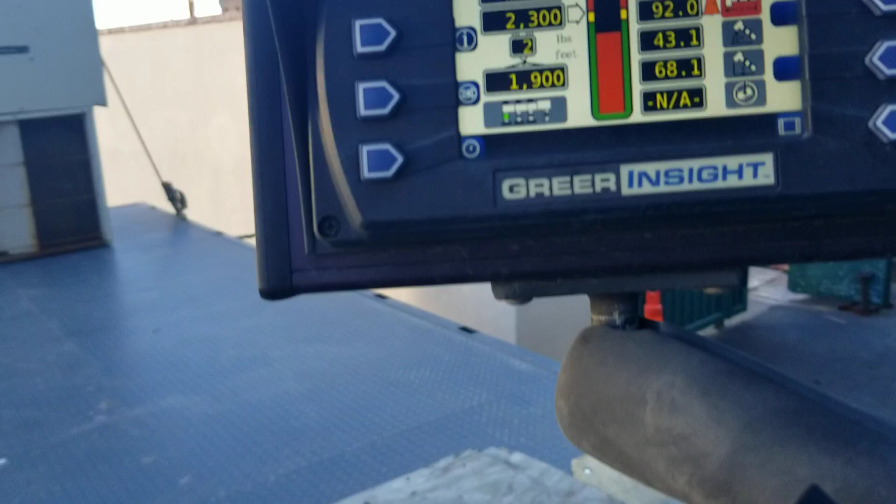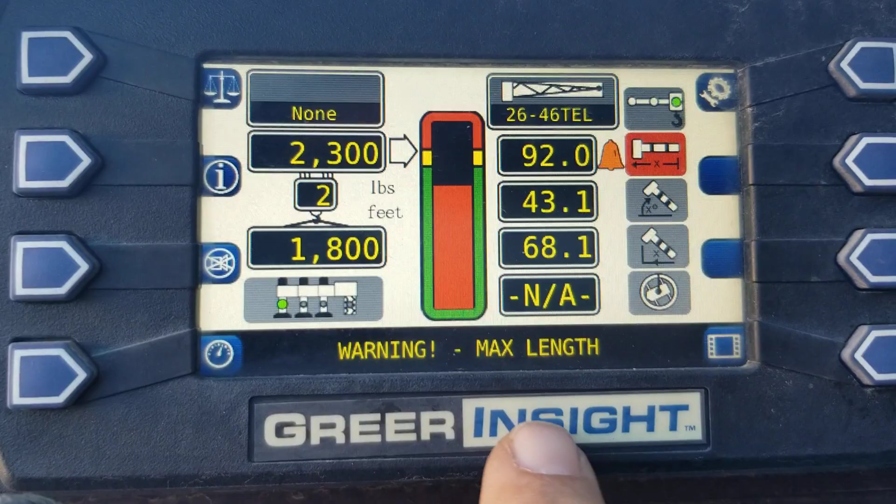Alrighty, here we go. This is called an LMI, load moment indicator. This is basically my computer for the crane. Tells me everything I need to know. Just a real quick rundown. This is an erroneous message. I think there's some kind of sensor wrong with this.

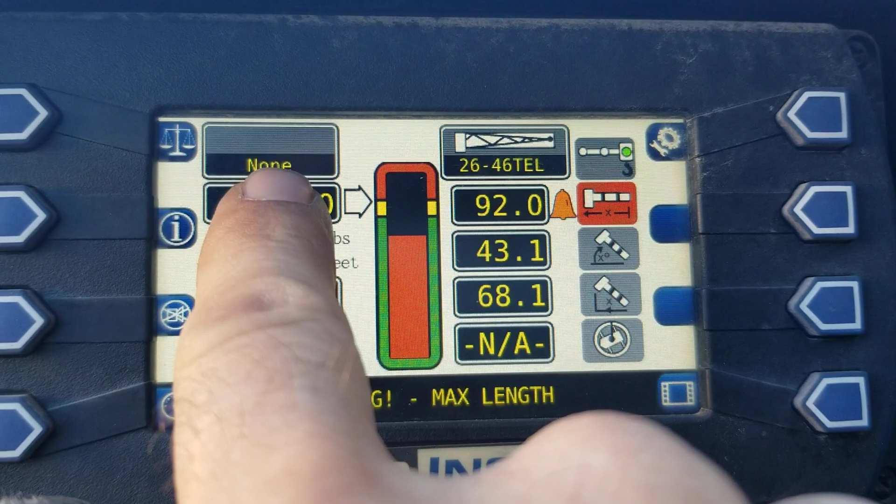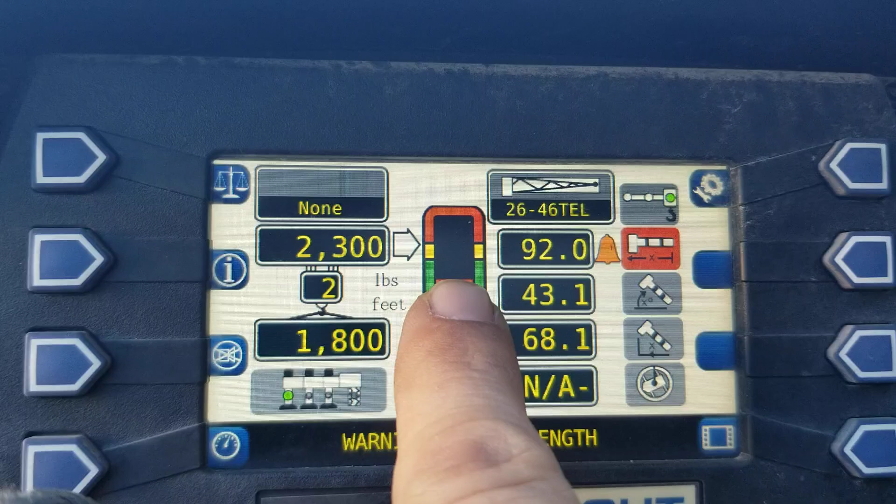Here, this is a counterbalance. A crane like this is not going to have counterbalance. This is my maximum load allowable. Over here, yellow, red, of course. Red is a no-go. Green is all good. You see I'm almost to the max. Here we have two. That's for two-parted line. That means it's reeved with two parts of line for this block.

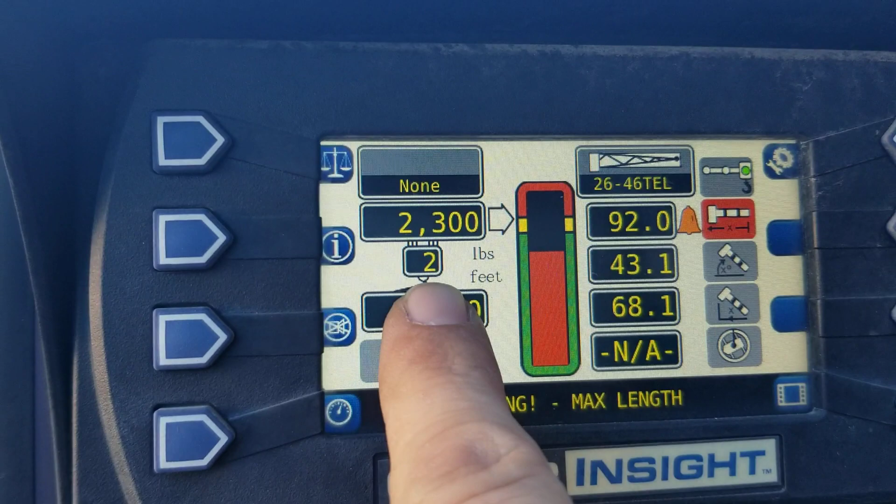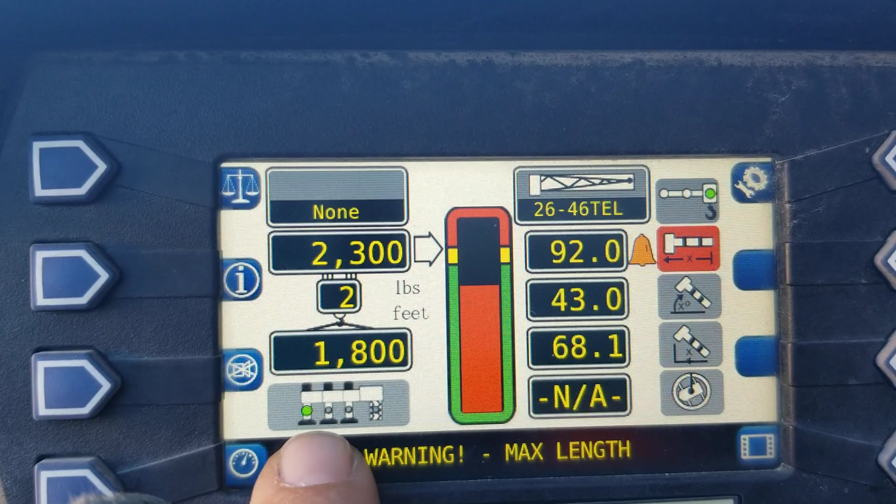This is what it's reading as far as the weight of the load plus the block and any other rigging that's involved. This is my outriggers. It's in the green, means I'm fully extended. This is the swing away jib, which is accounted for weight.

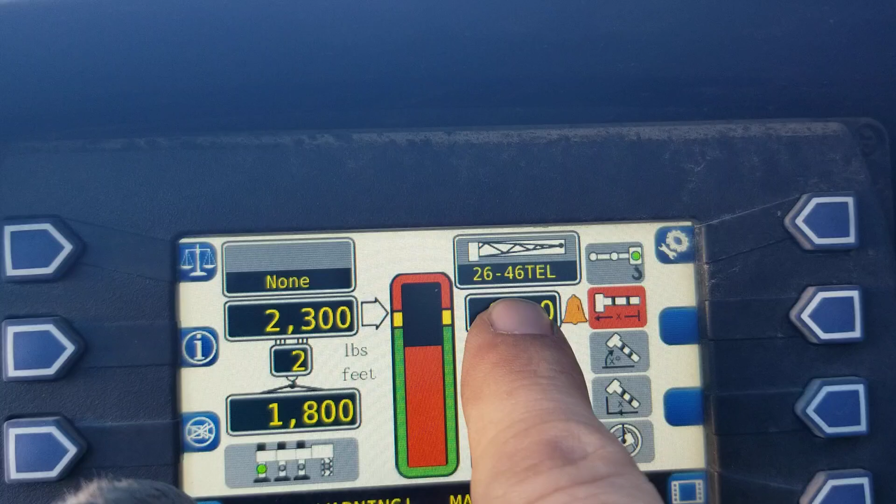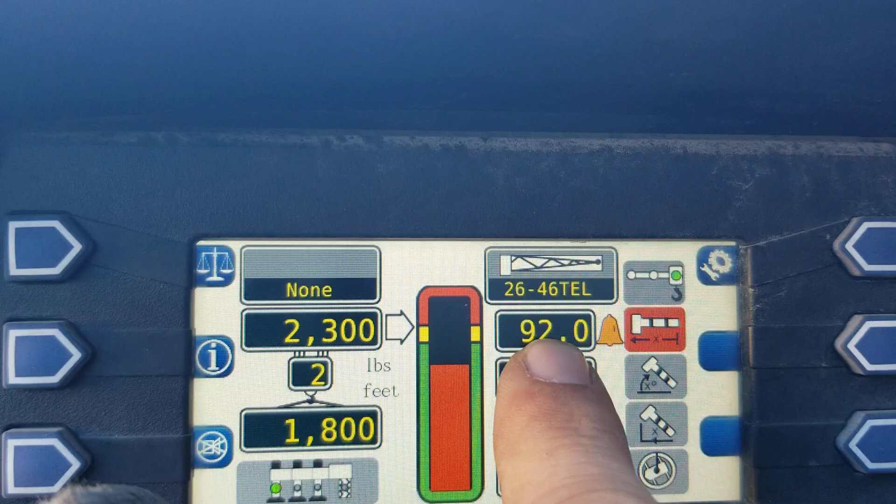This here, this is the maximum distance of the boom. The boom's at full extension. This is my angle of 43 degrees. And this here is my load radius. It's this distance of boom extended with this angle gives me this radius, meaning from the center pin of the crane to basically where the load block will rest.

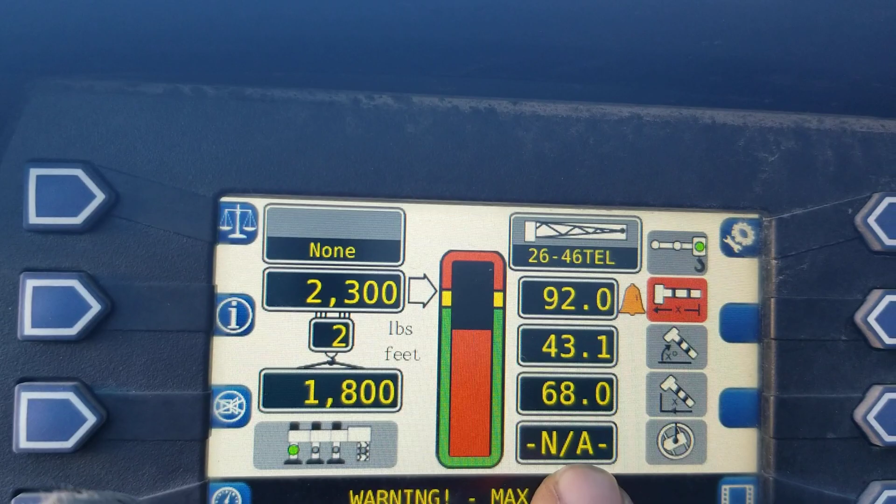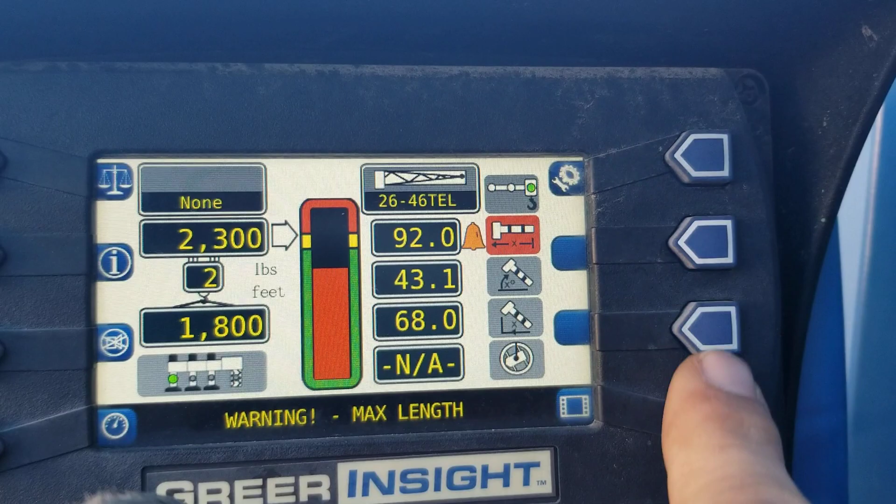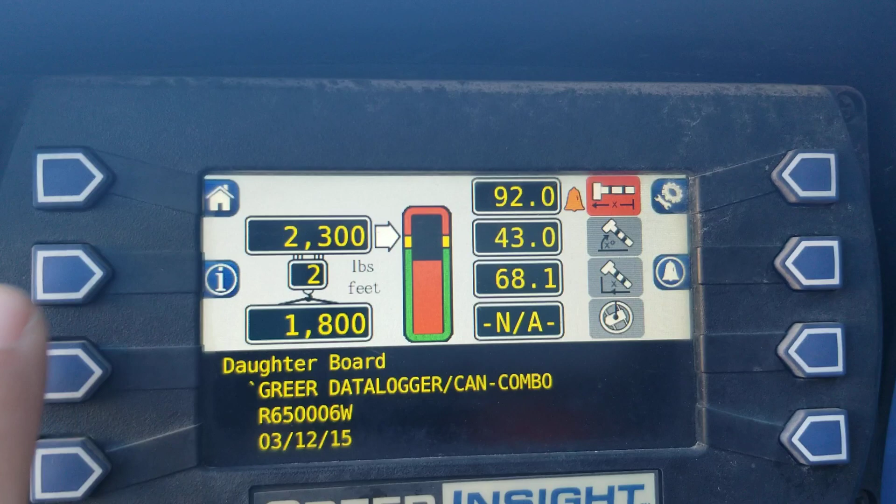And then this, I have no idea. This is something with my radius operating area. I don't use this crane. This is a rental, so I'm not familiar with this here. And you got buttons and shit that you can come in and access shit. This here, for example, is supposed to show my faults, which I don't know what the hell is going on. I think it's some sensor. So basically that kind of shit. Pretty cool.

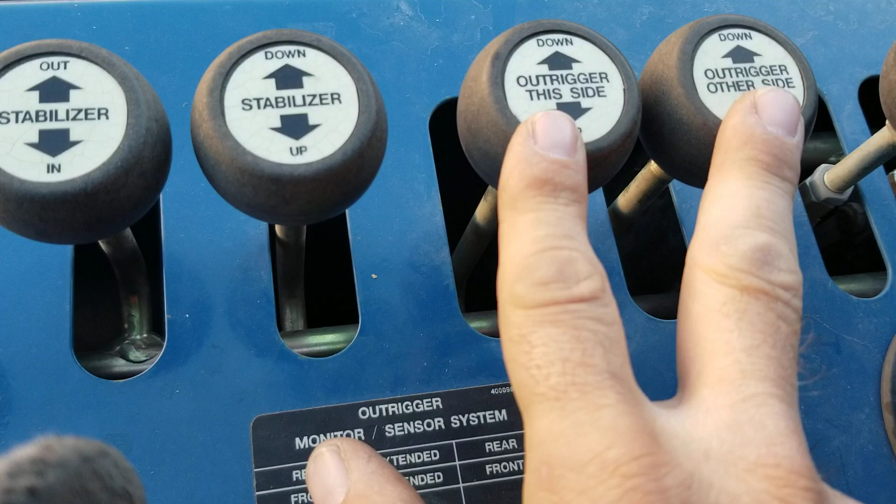These are the basic crane controls. Before you do anything, this is your outrigging. This is basically your jacks that jack up the crane to level it. These two are the main front ones to the sides of the operator station. This here is the rear, forward for out, in for in, and of course down and up. And this is for the very front stabilizer if you're going to go off the front of the crane.

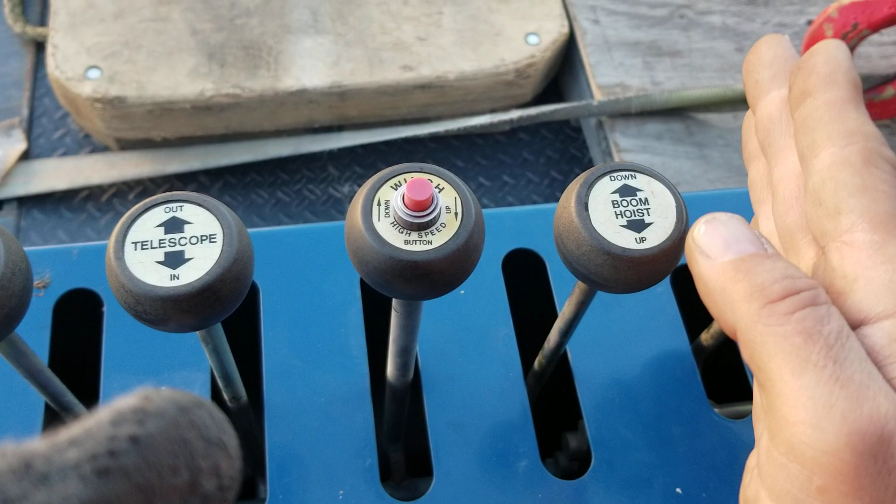Here we have our main crane controls. Boom up, boom down, line up, line down for the load block, telescope out, telescope in, and of course swing. These two operate with the most hydraulic fluid, so you can only operate this one with this and this, or these three together. You can't operate these two simultaneously. This here is for winch speed, to put it a little bit faster if you might want it to.

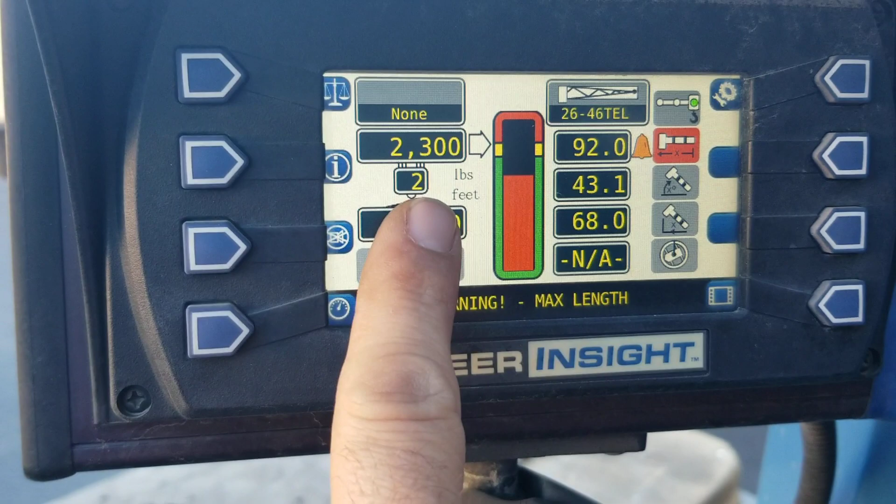This is a single overhead ball. Basically, this is what you'd have for one part of line, which this would read at 1 at that point. With that block that I have on it, there's your 2-part, and the block is indicative of this thingy right here. Okay, that's a quick intro to crane controls. Oh, here's my leveler, of course. We're gonna barely see that. I don't like using those.

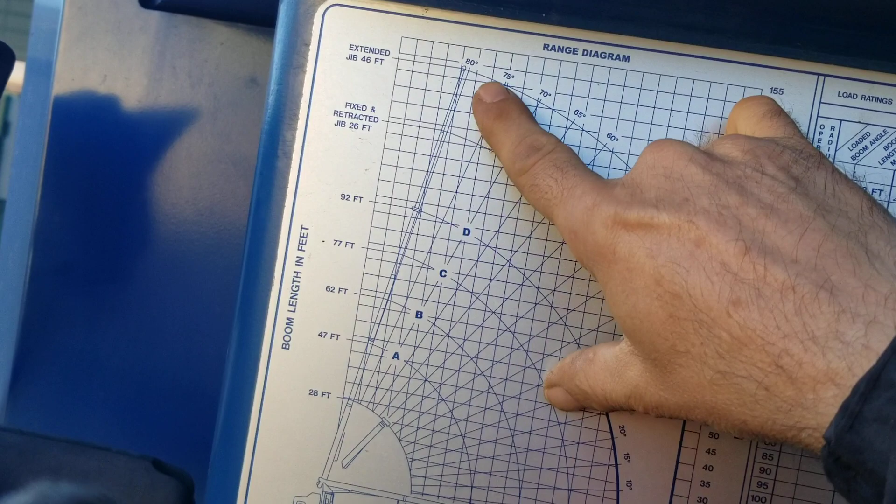I prefer a level. This is a range diagram. It's a quick reference. This portion here is if that swing away jib is deployed. This is basically for height. This can't be used under, what is this, 40 degrees? Other than that, it has to be stowed. And then this gives your radius versus your angle, which can be used for over here.

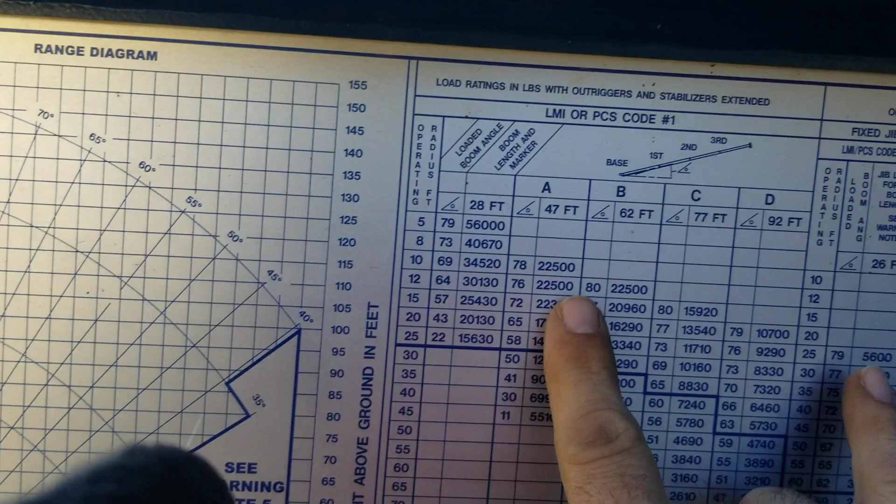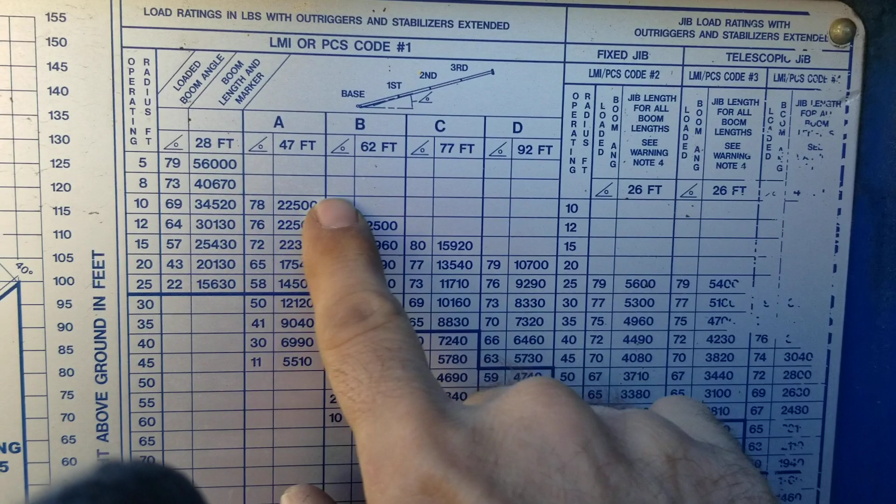This is your load chart. It's got several things, operating distance. So the farther out your radius is, it shows also angles and whatnot. This line here, anything above is going to break the crane if you exceed these limits. Anything below, if you exceed into these non-shaded areas, is going to tip the crane. But all these are for maximum reeving.

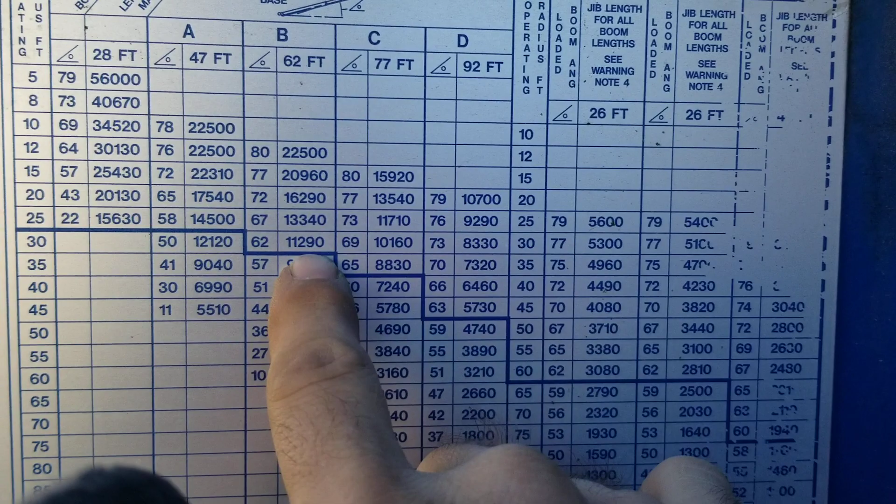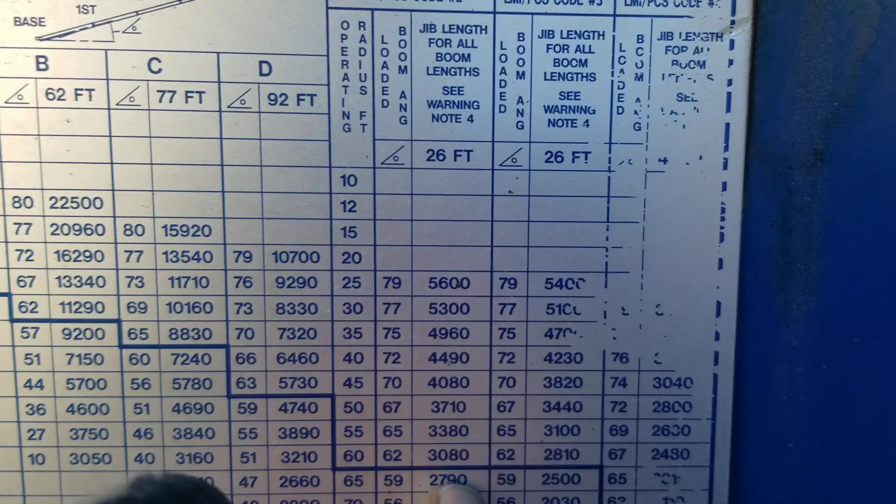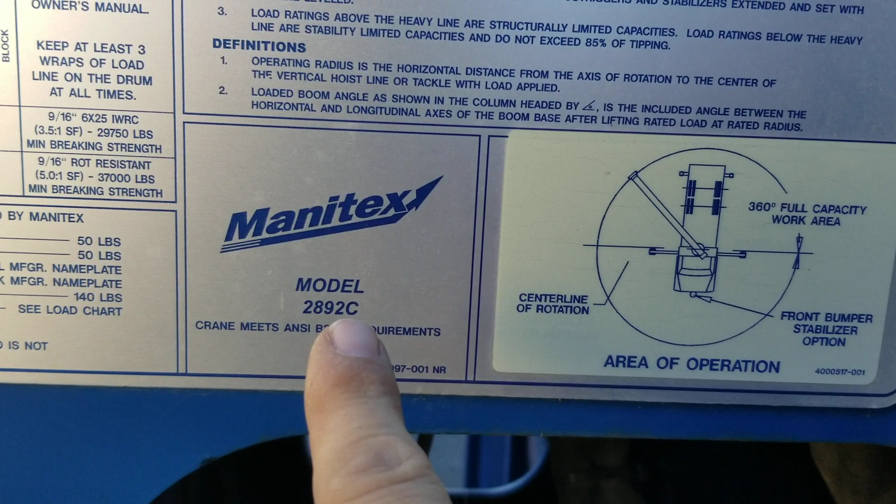So if you have your maximum load or maximum line up there, here's for your jib. Shows your different information of where you're allowable for your lift, maximum. Let's see, these are some of the basic warnings and whatnot. Basic information. This is a Manitex 2892C. Basically, it's a 92-foot boom.

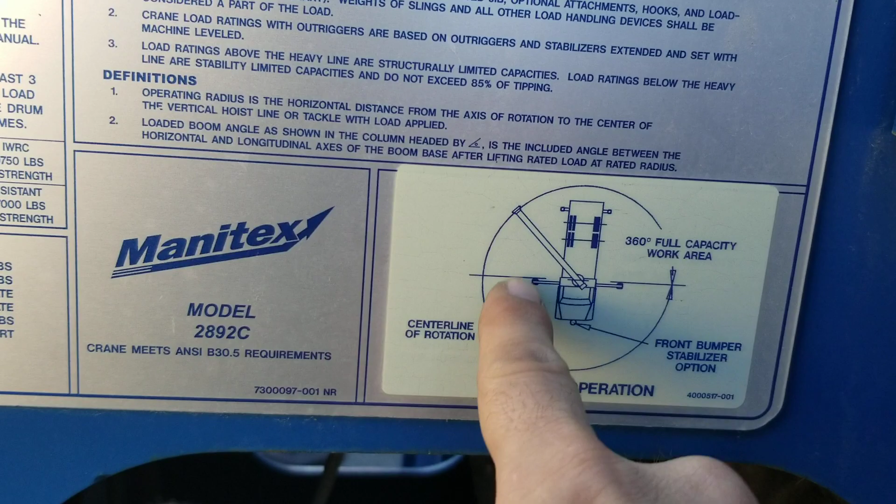And this shows your radius of full working. If you have your front, you can come into this area. If not, you're limited to this working radius area here. These are your deductibles for your auxiliary block, auxiliary sheave, overhead ball, load block is what I've got.

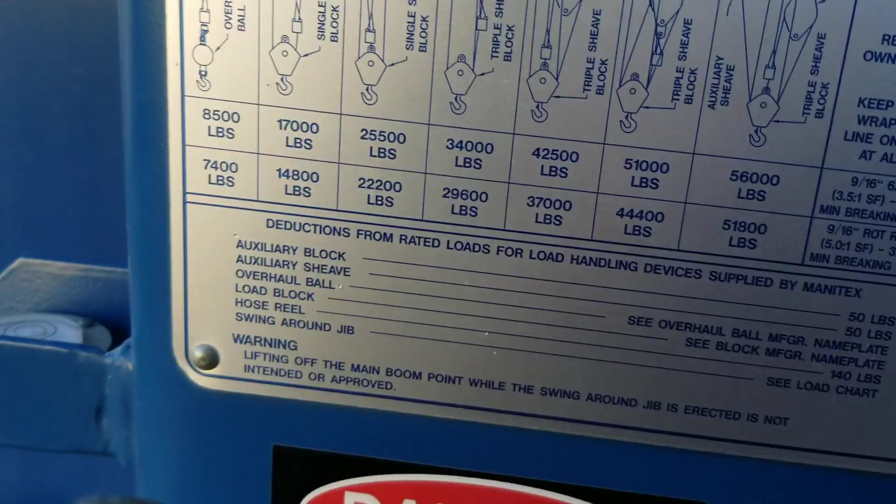Oh, gotta answer this. See ya.